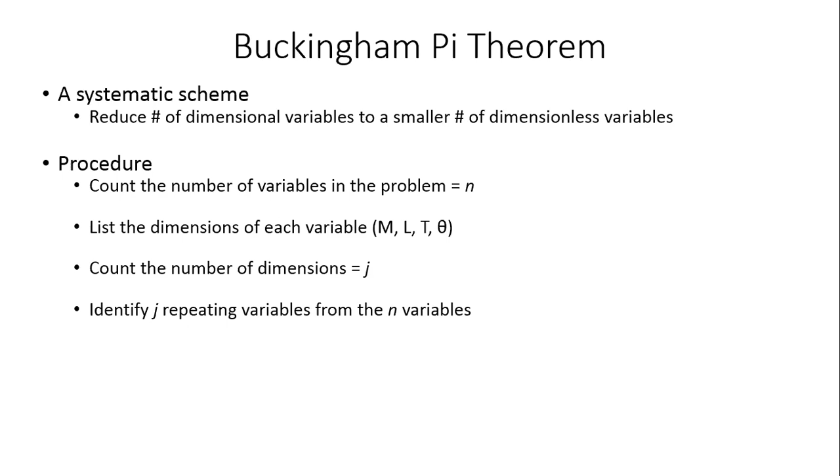Typically this j will have to be less than the number of variables in the problem. It's very unlikely that you have a j greater than n, but in most situations this j will be less than n. Okay, so identify j repeating variables from the n variables. And then you identify the number of pi terms. So this Buckingham pi theorem, remember this.

So why do we use the word pi here? Does anybody have a logical answer for that? Anybody? Sir, we use pi as a product. Correct. Right. So just like we say sigma for summation, right? When I say sigma and I write xi, that means summation of x1, x2, x3, x4, and so on. We all know this terminology.

Similarly, if I write pi xi, that will mean x1 into x2 into x3 into x4 and so on. So if I have n numbers, then pi xi will simply be the product of all of those terms, and sigma xi will be the sum of all of those terms. So this we are very familiar with. All right. So that is why we call this the pi term.

Okay. So we'll identify the number of pi terms, which we denote with the letter small k. Small k is the number of pi terms in the problem, and that will be given by n minus j. So you will have k pi terms, and each of these pi terms will be a power product. Now I'll explain what all these power products mean in the coming slides.

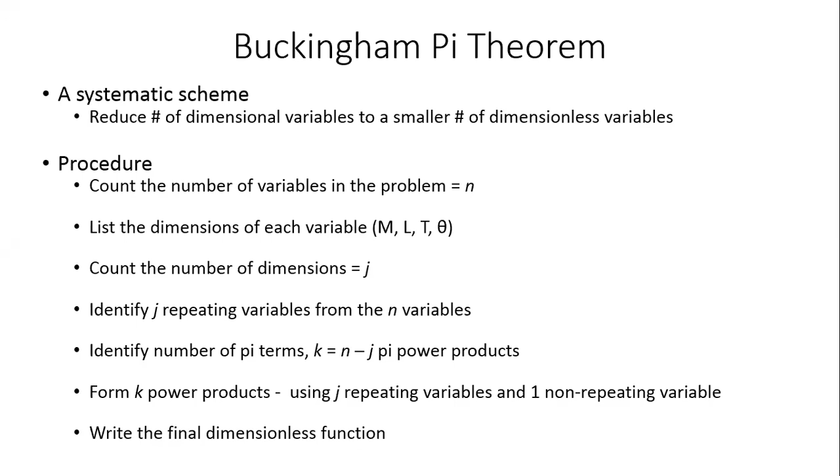Then we'll apply this Buckingham pi theorem to this particular problem. So in turbulent flow, the pressure drop in a pipe is a function of length of the pipe, diameter of the pipe, roughness of the pipe epsilon, density of fluid, viscosity of fluid, and velocity of flow. The question is to find an appropriate dimensionless relationship. So let us first write this word statement as a mathematical statement: the pressure drop delta P is a function of length of pipe L, diameter D, roughness epsilon, density rho, viscosity mu, and velocity of flow V.

Now that we've listed all the variables, remember the first step of the procedure was to count the number of variables. When I count the number of variables, I also have to include the variable that I'm interested in finding the relationship for. I'm interested in the relationship between delta P and all of these, so I'll count delta P also. Delta P is your first variable. 1, 2, 3, 4, 5, 6, 7. So in total, there are 7 variables in this problem.

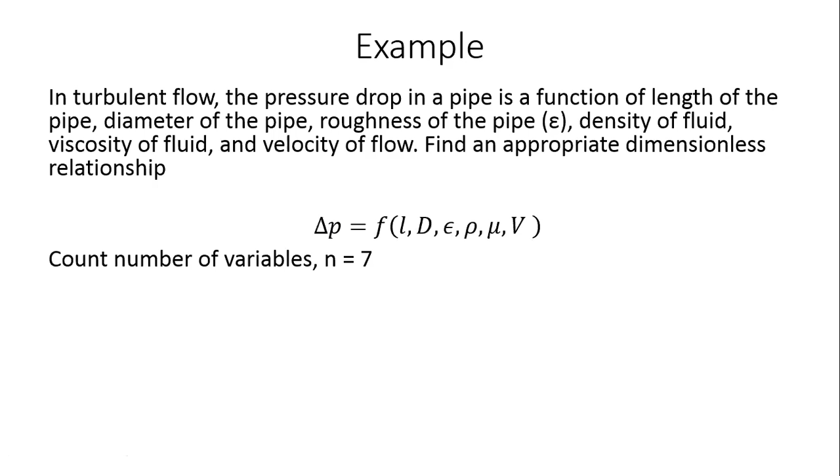If you remember, the next step was to count the number of dimensions in these variables. So first I'll write down the dimensions of all of these different variables. I think this is where your question was, right, Aditya? Your question was, why is epsilon dependent on L? Yes, sir. So I'm not saying it depends on L. Deliberately I use small l over here; this is the length of the pipe. This L is the dimension, right?

If I were to measure roughness, how would you measure the roughness? Yeah, that would depend on the dimensions of the pipe also. Okay. So let us say I have a plastic pipe, a PVC pipe. The inside looks very smooth compared to a concrete pipe. Even a lay person will say the plastic pipe is smooth and the concrete pipe is rough, because just by touching it you can feel the roughness of the concrete pipe, right?

Yes, sir. So what do we mean by roughness? If you zoom in to the microscopic level, the surface of that pipe is not really smooth, but it has got some up and down undulations. It is actually a rough surface if you zoom in microscopically. What is the size of that up and down? If it is 1 millimeter or 0.1 millimeter or 2 millimeters, whatever it may be, that is what this roughness is. Yes, sir. Okay.

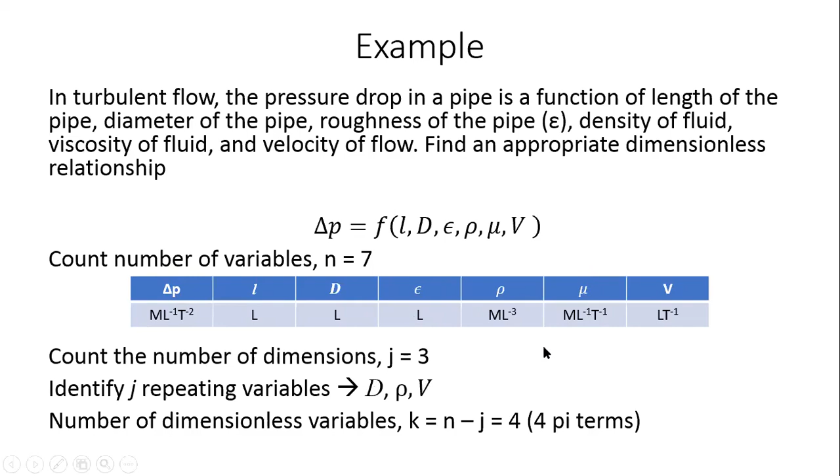Then as a convention in the first pi term, although you have 4 non-repeating variables to pick from, what are the non-repeating variables that are available to you? Delta p, L, epsilon and mu, right? Because d, rho and v have already been taken. But as a convention in the first pi term, we take the original variable of interest, delta p. This is the convention that we typically follow.

So my first pi term is capital D power a, rho power b, v power c into delta p power 1. Okay, so I'm interested in finding the values of a, b and c such that this product will be a dimensionless term. As I said, we are interested in finally finding out pi terms. Each pi term will be a dimensionless variable.

So now I'm writing this entire thing in terms of the dimensions. The dimension of d is L, so it will be L power a. Dimensions of rho is ML minus 3, so it's ML minus 3 power b. V is LT minus 1 power c times delta p, which is ML minus 1 T minus 2. So this entire thing must be equal to M power 0, L power 0 and T power 0, right? Any questions at this stage?

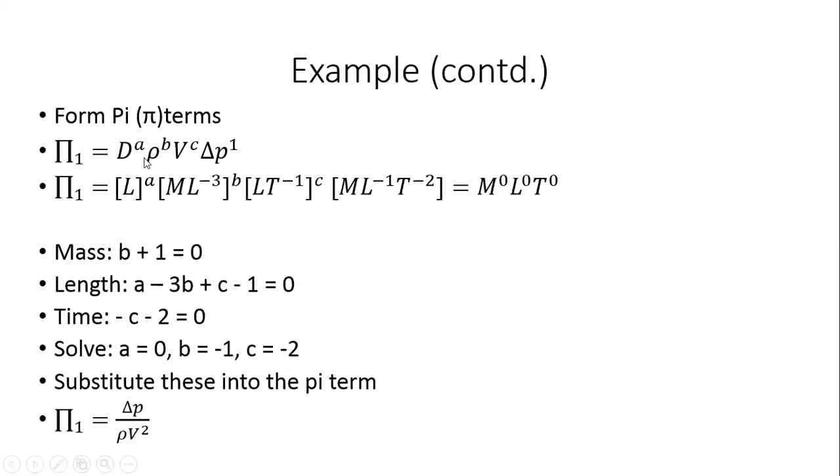Okay. So we've got the first pi term. Now similar thing we'll do for the second pi term, right? Pi2 equal to, now this is the important thing. You have to keep the repeating variables the same. D power a, rho power b, v power c. That is the same as the previous slide, right? That's pi1. Pi2 also has the same thing. Now I'll pick the next non-repeating variable, which is L, length of the pipe, L power 1.

This again, I'll just expand it out in terms of the dimensions of each of these different terms. This is very, very easy, right? I don't want to bore you with this. This is fairly obvious. So here you will solve it and you'll get a equal to -1, b equal to 0, c equal to 0. So if you substitute that, you will get pi2 equal to L by d. Now this is something that you could have guessed even without doing this entire thing, right?

There is only one possibility in which you can get a dimensionless term when both diameter and L are there, right? And rho and v, there's no way they can cancel out, because one has M and L, the other has L and T. So there is no possibility of any value of b and c such that M can get cancelled out. There is no other term for M, so b has to be 0. There is no other term for time, so c also has to be 0. So the only possibility where you can get a dimensionless number is L by d. Pi2 equal to L by d.

So very easy. Now we go to the third pi term. Same thing, d power a, rho power b, v power c, epsilon power 1. So now this is exactly the same as the previous pi term. Previous pi term was L power 1. Here, instead of L, I have epsilon power 1. But epsilon and L both have the same dimension L, right? And again, rho has ML^-3 and v has LT^-1.

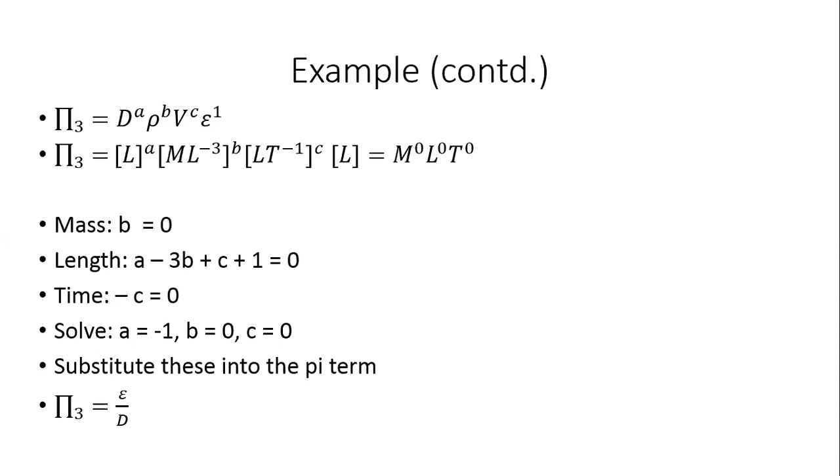Similarly, with the previous one, if I had picked length as the repeating variable and diameter as a non-repeating variable, instead of getting L by d, I would have got d by L, which is the same thing, right? All right. So I've got these four dimensionless terms. Now I'm going to put them all together. These are the four dimensionless variables that I've got.

Pi 1 equal to delta p by rho V square. Pi 2 is L by d. Oh, sorry, this should be small l by d, not capital L by d. Pi 2 is small l by d, where small l is the length of the pipe. Pi 3 is epsilon by d, and pi 4 is mu by rho V d. You can write it as rho V d by mu also, no harm done, because it's anyway dimensionless. So my final function will look something like this: pi 1 equal to function of pi 2, pi 3, pi 4.

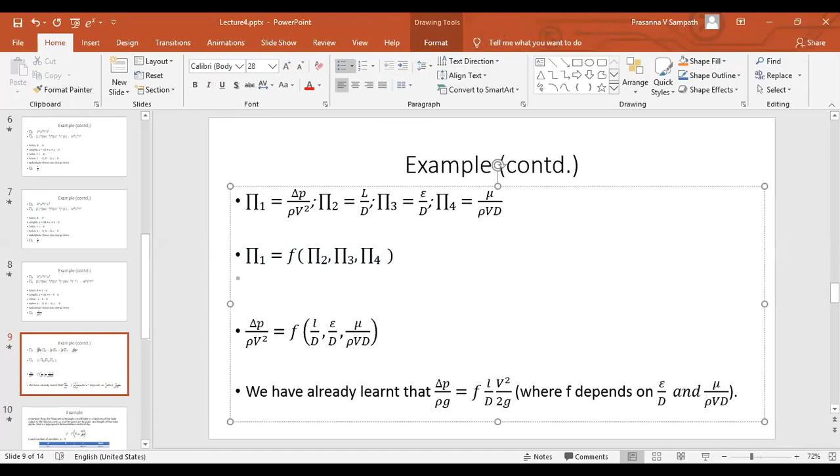Oh, I'm sorry. This should be pi 2, comma, pi 3, comma, pi 4. It is not the product. Let me correct it right now. It is not the product of pi 2, pi 3, pi 4. It is pi 2, comma, pi 3, comma, pi 4. So that is the final pi term: pi 1 is delta p by rho V square equal to function of l by d, here I've written it correctly, not capital L by d, epsilon by d, and mu by rho V d.

So you can clearly see that this is so similar to what we've already derived in class, right? We've already learned about delta p by rho g. What is delta p by rho g? Pressure head? Not pressure head. P by rho g is pressure head. Delta p by rho g is head loss, hf. Right? Delta p by rho g is nothing but hf. Let me write that here. This term is just another way of writing h suffix f.

So head loss, you know this equation, hf equal to f into L by D into V square by 2g. See what this is telling us. If you cancel out the g and bring the V square to this side, it will be delta p by rho V square equal to f. Of course, this f is friction factor, and this F is the function. Don't get confused between them. So this friction factor depends on epsilon by D and rho V d by mu, or mu by rho V d. You can clearly see this friction factor is simply a function of epsilon by D and mu by rho V d, right?

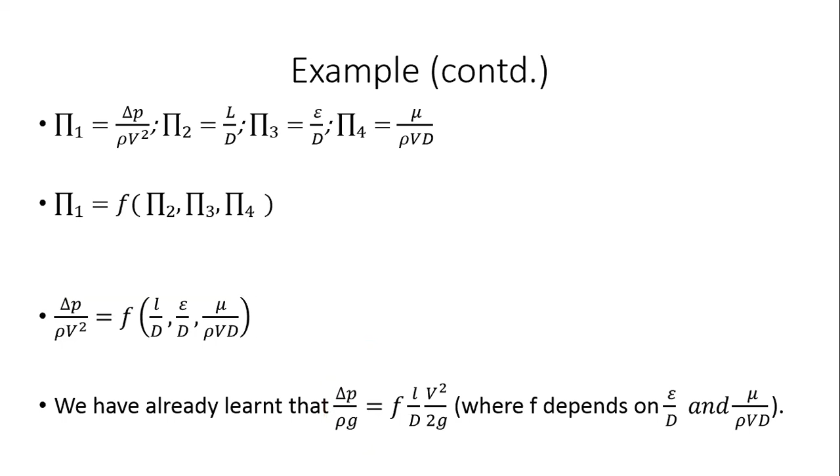All right, so let me go to the next. One more example. In laminar flow, the flow rate Q through a small tube is a function of the tube radius R, the fluid viscosity mu, and the pressure drop per unit length of the tube dP by dx. So this is very similar to what we have just discussed. Now the question is to find an appropriate dimensionless relationship.

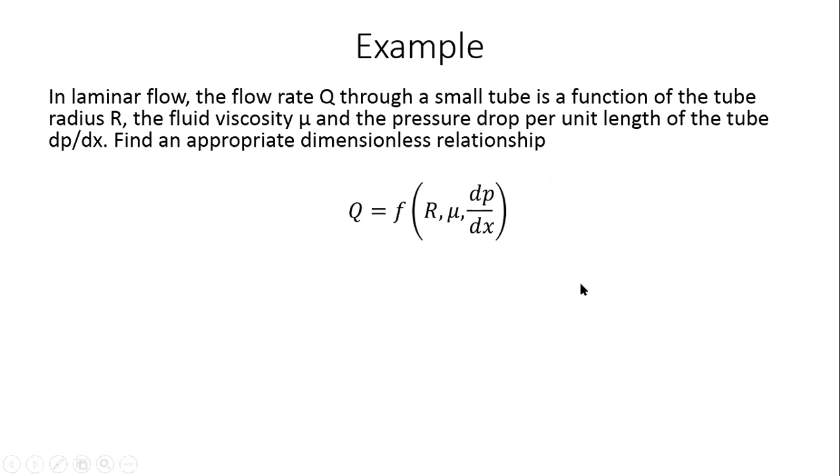So instead of saying delta P is a function of L, here I've taken dP by dx, which is pressure drop per unit length, and I'm equating it to the flow rate Q, right? So it's very similar to the previous one, but it gives a different flavor. So we first convert this into a mathematical statement: Q equal to function of R, mu, dP by dx. Count the number of variables: 1, 2, 3, 4, right? Q, R, mu, dP by dx.

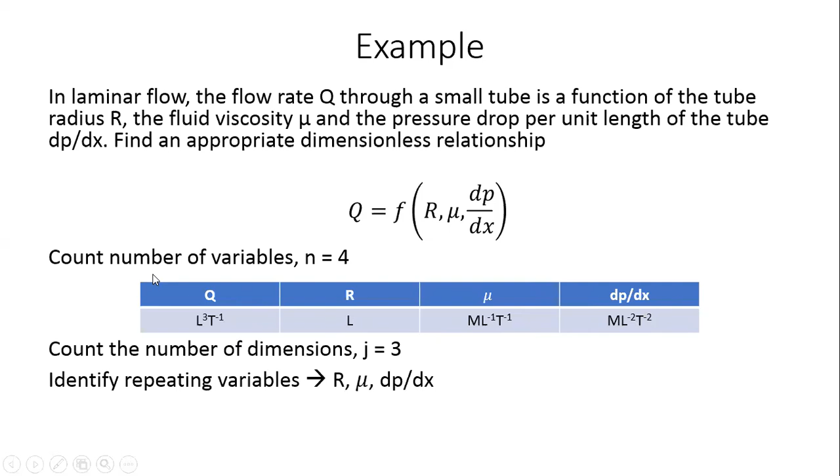Then write the dimensions for each of those: L cube T minus 1, L, M L minus 1 T minus 1, and so on, M L minus 2 T minus 2. Then count J, the number of dimensions, 3, right? M, L, and T. Then you identify the repeating variables. Now here, yes, anybody? Sir?

Yes. Sir, after knowing that Q is a function of R, mu and dP by dx, how will we know this equation in the first place? That's a good question. So now let us say I ask you a question, right? I give you a stone which is flat. I give you another stone which is spherical.

Both these stones have the same weight. I ask you to throw both these stones, and I ask you which stone will fly farther. You are assuming that you are throwing both of them with the exact same speed, same angle, everything. You understand the question? One stone is flat. I'm sure all of you have played with that stone.

If you throw the stone at the water surface, it'll bounce on the water multiple times. You've all played with this, I'm sure. Flat one will go long. So the flat one will go long. How did you know that? Only if we make a correct... Yeah, if you throw it such that the flat surface is parallel to the direction in which you are throwing it.

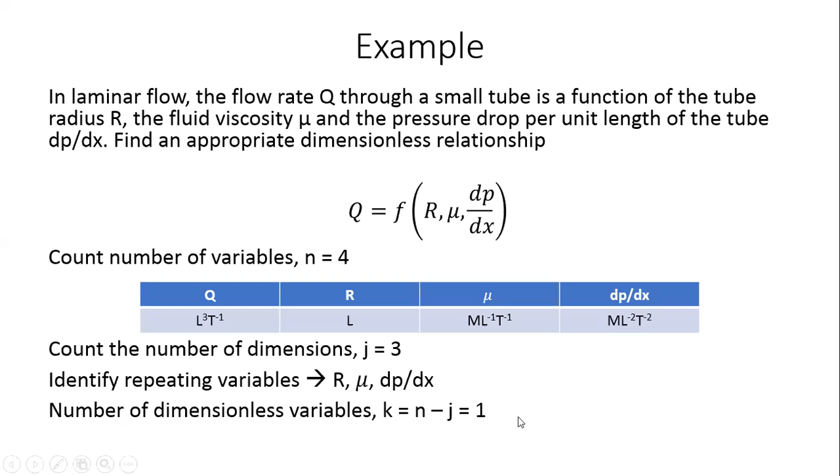Whatever variables are available, you have picked them. So there's no question of picking a simpler variable and so on, right? So you have picked these three variables. Then the number of dimensionless variables, which means the number of pi terms, is k, which is n minus j, which is equal to 1. So you will only have one pi term.

So let us build the pi term quickly. Pi 1 equal to r power a, which is our repeating variable number 1, mu power b, repeating variable, dp/dx power c, third repeating variable, times q, which is the non-repeating variable, power 1. So I'll expand this out and equate it to M^0 L^0 T^0. Then I'll separate out the mass, length, and time and write out the expressions for a, b, c. I get three equations, three unknowns. You solve for it. I get a equal to -4, b equal to 1, c equal to -1.

I substitute those back. I get pi 1 equal to q times mu power 1, that's what b is, divided by r power 4, because a is -4, times dp/dx in the denominator, right? Now the interesting thing is, if there's only one pi term, then pi must be equal to some constant. If this is dimensionless, it should be equal to some constant. It can't take multiple values. This entire thing must be a constant.

So now this is also very interesting. This also you have learned in your theory in laminar flow. So this is the final answer: pi 1 equal to q mu by r power 4 dp/dx is a constant. I'm just going back to what we learned in theory. If you go back to your notes, you will see this equation somewhere when we were deriving this. You would have seen q equal to minus pi by 8 r power 4 by mu dp/dx. We extended this.

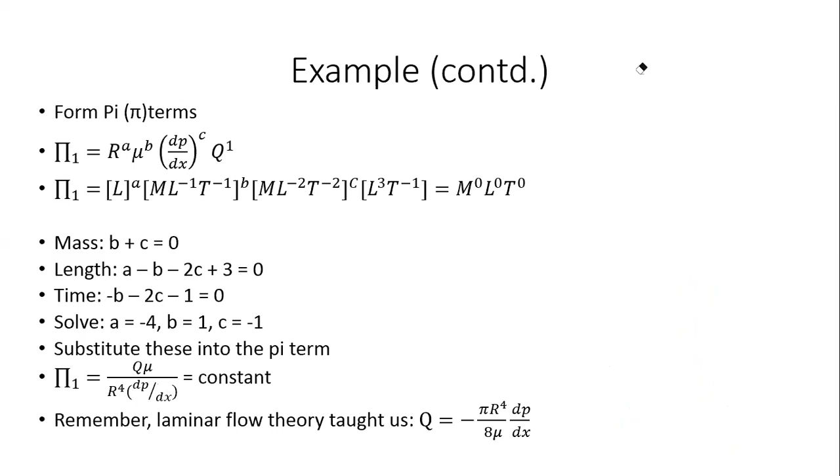So let us very quickly finish this off and go on. Now we are going to talk about similitude or similarity. So far we have spoken about identifying pi terms. Once you identify the pi terms, you have to go to the lab and run the experiments, and vary the different values of L by D or epsilon by D, depending on what your pi terms are. But when you do the experiments in the lab, typically you are trying to do it for something that you want to implement in reality.

As I said, the aeroplane that is flying in the air. Now, when you recreate that aeroplane inside the lab, the real aeroplane is obviously much bigger. You're not going to create a life-size aeroplane inside the lab. You'll create a much smaller aeroplane inside the lab, which must be similar to what the actual aeroplane is going to be.

Okay, so when I say similar, there is a particular connotation that I have for similar, right? So a model scale aeroplane, typically you will test that one in the lab before you build a full size prototype, right? A prototype is basically a working version of the aeroplane, right? So when I build that model scale aeroplane, I have to ensure that the model and the prototype are similar. Okay, so when I say similar, I have a very particular idea of similarity in my mind.

I mean that these two, the model and the prototype, must be geometrically similar, right? So if the prototype is 100 feet long and 30 feet wide, then the model must also have the same ratio, 100:30. It should have the same 100:30 inside the lab also. You can't change the length scales and so on, right?

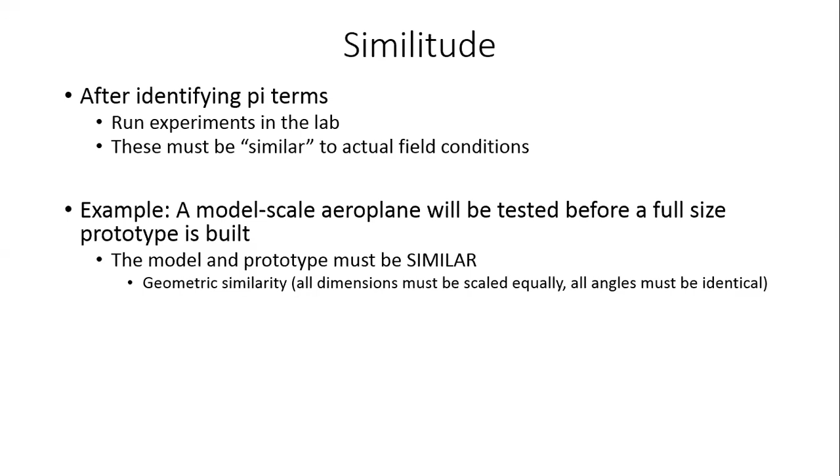Similarly, the angles, whatever angles that are there in the original prototype that you intend to build, the model must also have the same angles. So the geometry of the model and the prototype must be exactly same. So that is called geometric similarity. Okay, this is a necessary condition. You require this. Okay, so that's one level of similarity that you must have.

The next kind of similarity that you need to have is called kinematic similarity, right? So not only should the length scales be same, even the time scales should be same, right? In other words, if length and time are appropriately scaled, then the velocity scale must also be the same, right? Because these two together mean the same thing.

So if the real aeroplane is experiencing 1000 kilometers per hour of wind, then the model aeroplane must experience something that is scaled down to its actual size, right? So the model may be 100 times smaller than the real one. So the velocity also, we have to find out what scale you must apply. If it is 1000 kilometers per hour, maybe you have to apply 20 kilometers per hour for it to be exactly identical to the real prototype. Okay, so this is the second kind of similarity.

The third kind of similarity that we expect is the dynamic similarity, right? So it should have the same length scale, the same time scale, and also the same force or mass scale ratios, right? So if the real aeroplane is weighing 5 tons, and it is 100 meters long and 20 meters wide or whatever it is, then when you make the smaller one in the lab, the weights, the forces or the mass should also be scaled appropriately.

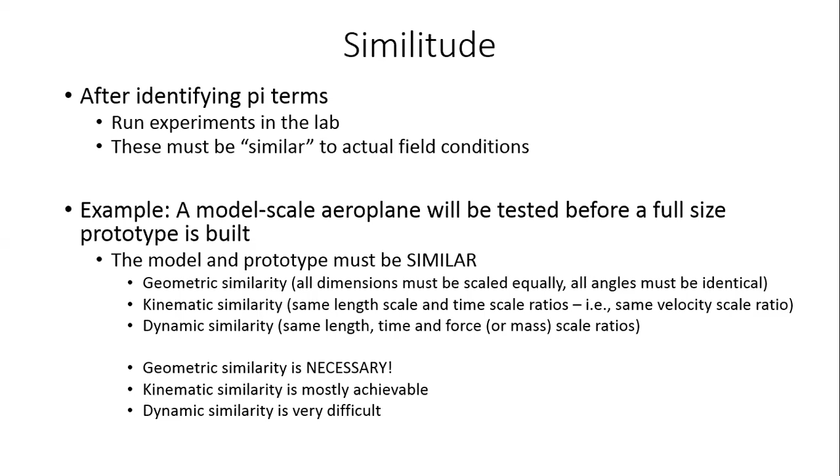So next year, most likely when you go for the field visit to Polavaram Dam, you will see the Polavaram Dam model. It's not like it will fit on top of a table. It's a big room, probably 50-60 feet long by 50-60 feet wide, and the entire room was filled with just that Polavaram model. So that's how big that model was.

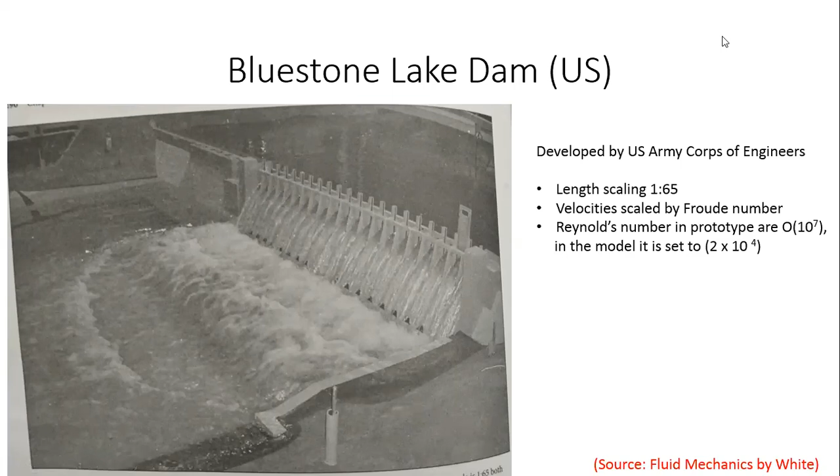All right. Oh, we've gone past time, I'm sorry. As usual, if you have questions, please send them to me. This is the most we're going to talk about dimensional analysis. I'll send out a problem set today, and next week we are going to talk about open channel flows.